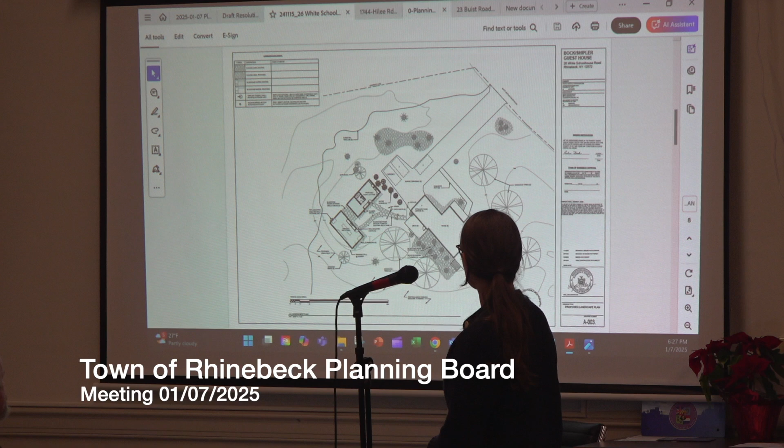And so we're applying for a special use permit. And the existing horse stable on the site, we had actually talked about maybe removing it, demolishing it, because it's not in great shape. But at the pre-conference meeting, we talked about how the look of it is actually quite nice. It feels historic and it feels like it belongs in the place. And I think the owners agreed as well. Really, we were just worried about the number of accessory structures on the site.

So they've decided we're definitely going to keep that, but we are applying for a zoning variance to have 5 accessory structures above the allowable 3. One of those accessory structures is actually the garage that's attached to the house, so just keeping that in mind. And then one is a shed that really can't even be seen from the street or from the front of the house. It's really kind of tucked back on the property.

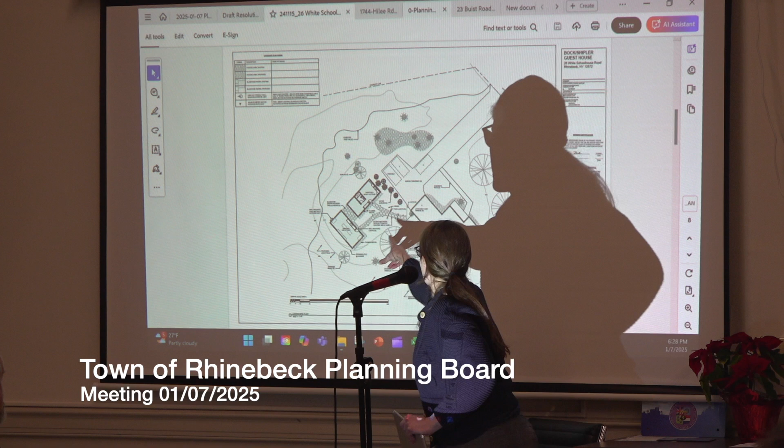So just looking at this landscape plan here, we have a new bluestone path from the main house to the accessory structures. This is the art studio, and this is the guest suite, which will have a bedroom, full bathroom, and kitchenette. And we're pretty far set back from the street. I think it's about 140 feet back from the street, and we're set back far enough from the side lot lines as well.

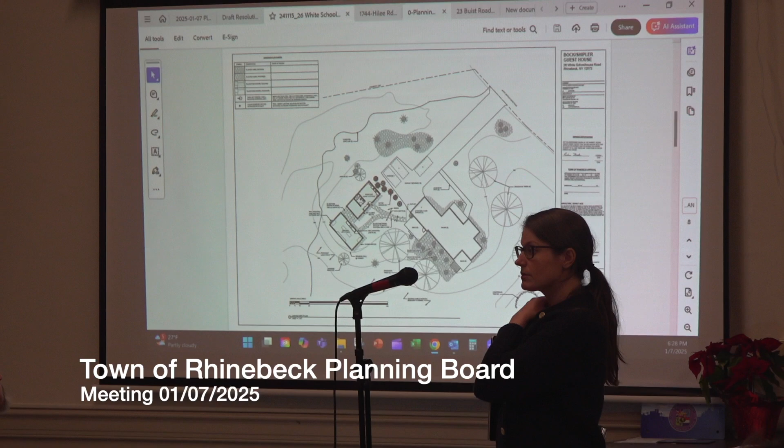Did you have, do we have renderings? Renderings and pictures as well. Yeah, these are all the existing photos of where the structures are going to be located. And this is elsewhere in the backyard area. It's an existing bluestone pathway that we're basically intending to continue that same language for the new path to the new structures.

So looking from the street view, this is where the structures will be, just off to the right of the main house.

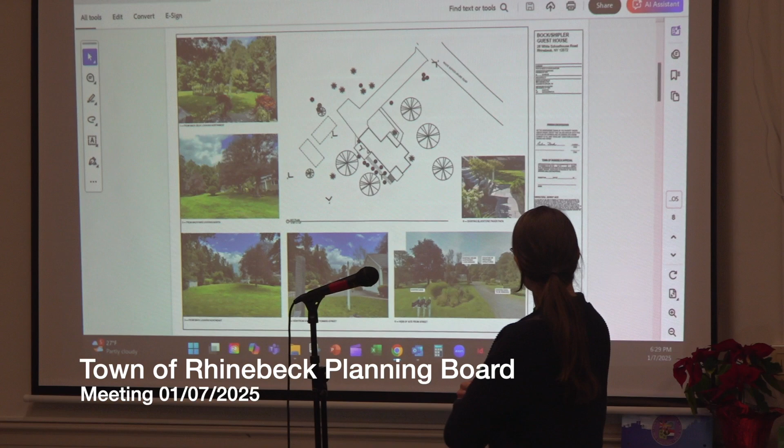Are there elevations of the new structure? Yes. So each is a pretty simple volume with a shed roof. We're using board and batten siding, which is the same as what's on the existing horse stable. It's actually a very similar proportion to the horse stable, which is also an L shape. So the idea is to kind of make it feel as though it's part of that kind of language on the site.

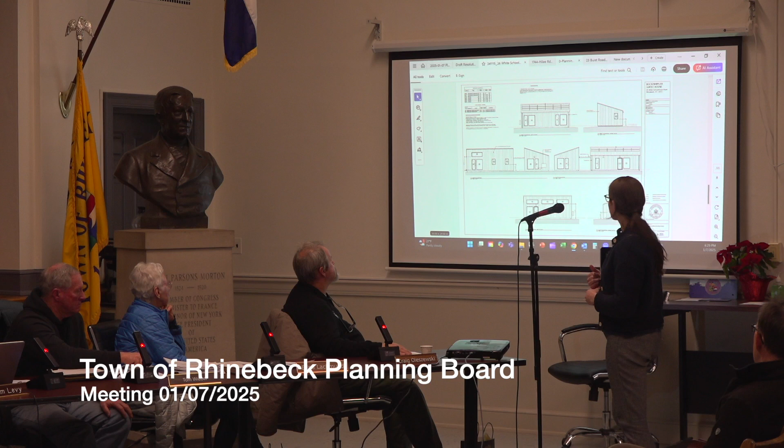And we're looking at some large windows as well as solar panels for the roof. Do you have a color? We're working on that, thinking something in the realm of the house and the existing stable, maybe somewhere in between. The house is sort of a pale sage green. The barn is a little bit of a darker green, so somewhere in between those. If you could make that choice before you come back to the public. Sure, that would be terrific.

Yeah, we've been working on a rendering. The zoning board actually requested a color rendering, so we can provide that at the next meeting for you guys as well. Are those skylights on the roof? No, those are actually solar panels. Ah, photovoltaics. Any solar on the main house? There is no solar on the main house, but there are existing solar panels on the barn, on the horse stable, and those will basically remain as is, and these will be additional panels.

The siding you said is vertical board and batten, is it actual wood? Wood, okay, yes. Yeah, Jim, do internal layouts? Yes.

So the guest suite has the kitchenette along this wall with a window facing the street, and the plan is to have some shrubs here to provide privacy and conceal it from the street. Living area, dining area, and then the full bathroom, bedroom. And then in between is kind of a breezeway with a trellis that hopefully some plants will be able to grow on. So the idea is to connect the two structures visually, but they're not actually connected with an interior space. They will be totally separate in terms of their enclosure.

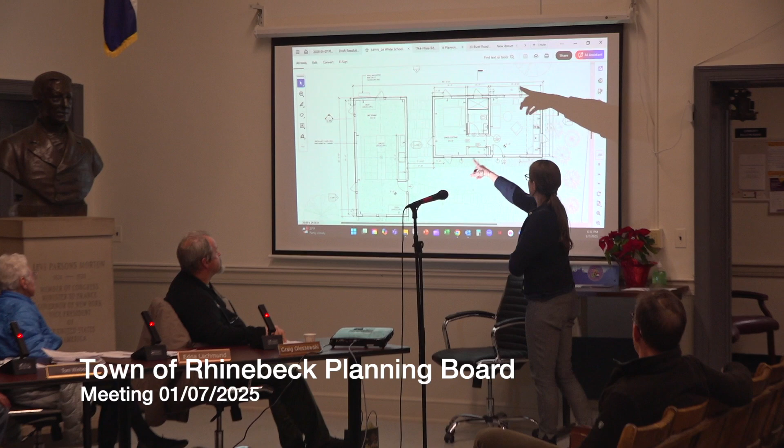And then this is the studio, the art studio, where the owners would like to primarily be making ceramics, but there will be no firing in this studio. It will be just using a potter's wheel and creating the pottery work.

So there's a sink, which will have a special drain on it for sediment, and otherwise there's a floor drain. Otherwise, it's kind of intended to be a big, open, flexible space that they can use. Where does the sediment go? What's part of the processing?

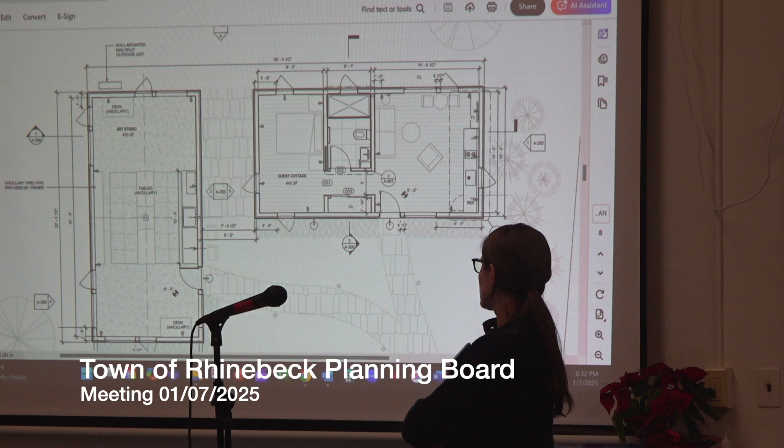The septic? It does go to the septic. Yes, there will be a new septic system for this structure. The existing one actually we don't think has capacity for the additional bedroom, so we're working with the civil engineer on the design of that—he hasn't put that together yet, but the sediment catcher is something we'll discuss with him. I think it does actually catch some of the sediment before it goes in there and dispose of it. Is that right? Well, we can clarify that.

Sometimes with other studios, we ask specifically about the materials that will be disposed of, and there's probably something you should bring. Have you worked with the health department yet? Not yet, because we don't have the engineered drawings yet, but we will be. That probably should be something you discuss with them as well.

Okay, Jim, let's start with you. Okay, a couple of comments, a few questions.

So it was noted, and we did discuss in the pre-con, that while the barn was historic, it was an element of the property and has to be preserved. It is going to be preserved, and that is really the reason why you're going to the ZBA—we did talk about preserving the barn on the site. We felt it kind of fit into the landscape, and it was a shame to lose it. There was a picture of it. Yeah, it's tough to see. So that's the reason for the ZBA variances for the barn down here, and we will actually be talking about that later tonight, because we have a referral from the ZBA on that.

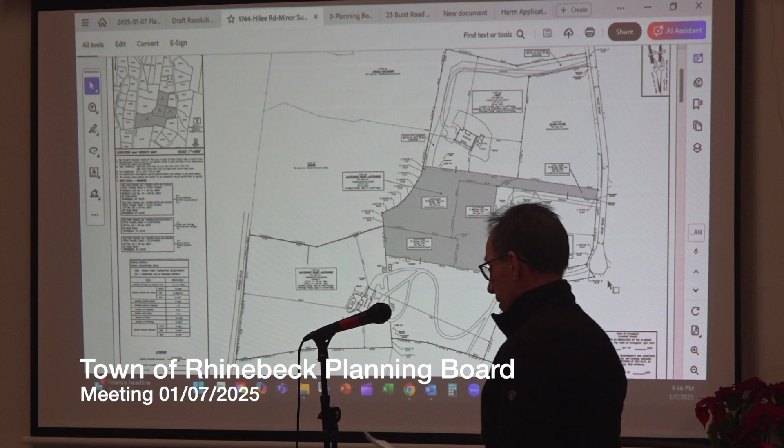This is Hilee Road, Village of Rhinebeck. The water storage tank is located here, and these parcels here were actually part of the original Trend subdivision. This is Burger Road, located right here, and here's Hilee. Scott and Kristen actually own 2 parcels.

It was a subdivision done on Burger Road, and this was lot number 1 of that subdivision. They also purchased the lot where their residence is located, going like this, for construction of the residence. You can see there was a combination of lots, so this was a previous boundary, and now it's all 1 parcel.

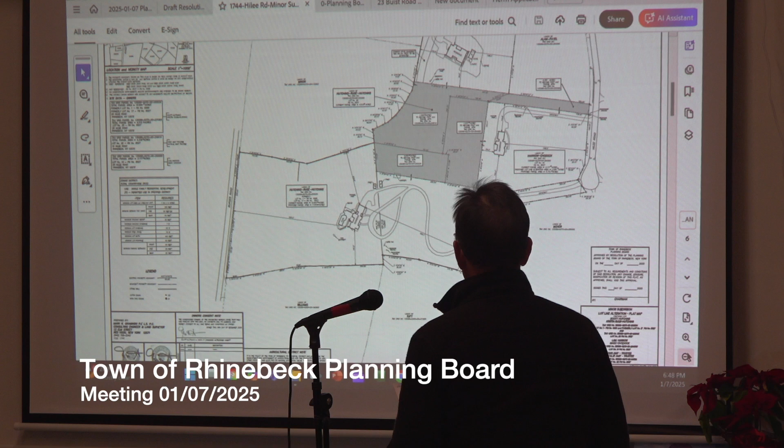I know I'm challenged with colors, but I tried to find contrasting colors that show the final configurations of the property. I also did an aerial overlay. I can go through all the mathematics with the board, but in summary, the lots are getting larger. They were conforming to begin with, and they're now conforming. None of the setbacks for the residence structures on the property require any consideration by the ZBA.

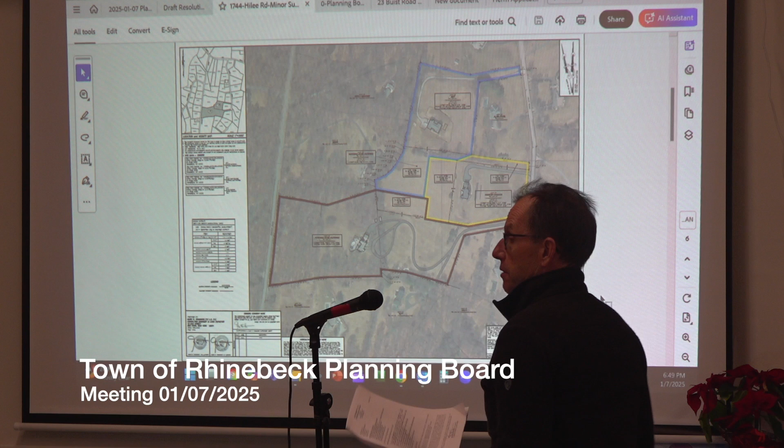So it's simply a lot line alteration that considers these multiple parcels of property.

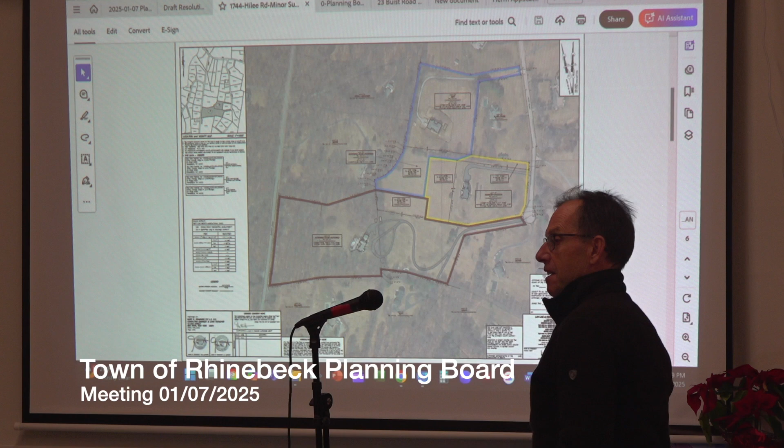I think that's one of the easiest ones I've done in a long time. I would agree, I think we would all agree. Jim, is there anything you'd like to say? I have no issues at all. It's taking an existing lot and subdividing it into other existing lots. We're not adding any lots, so no issues. I think it looks really clean and gets rid of that flagpole, tidies everything up.

I don't know if anybody has any questions at this point. What should you think of it being a little more square? And the colors? Yeah, whatever, but that all makes sense to me.

I'll certainly take comments on the colors, always happy. I like bright green. I do too, it's my favorite color. Everything is green or brown when it comes to being in a field too much. Anybody else? No, all right.

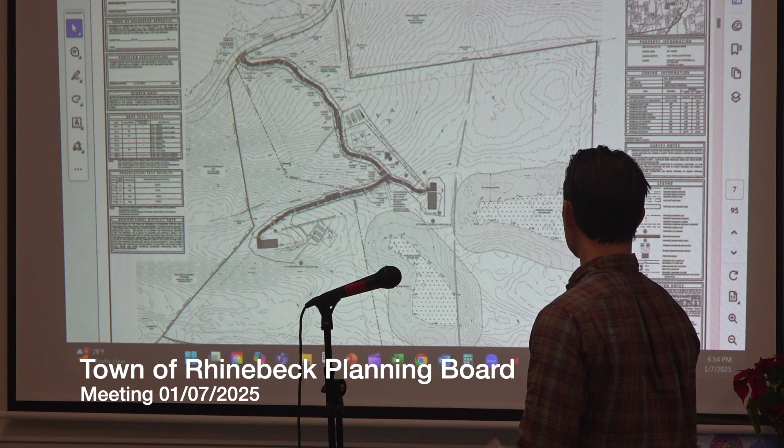There were a lot of comments at the workshop meeting that we went through, and they're all addressed in the narrative. I'll go through those now. But that's the gist of it.

Okay, so as you noted, there were a number of comments. I'm just going through them really quickly. Some of them I think may bring up some discussion, but I think a lot of them have been addressed.

One was that we noticed the driveway is running through an existing stone wall, and as you know, we try and preserve stone walls whenever possible. The applicant has noted that it's going through a significantly deteriorated portion of the wall, specifically chosen due to the poor quality of that portion, so I think that's something we'll want to look at during a site visit.

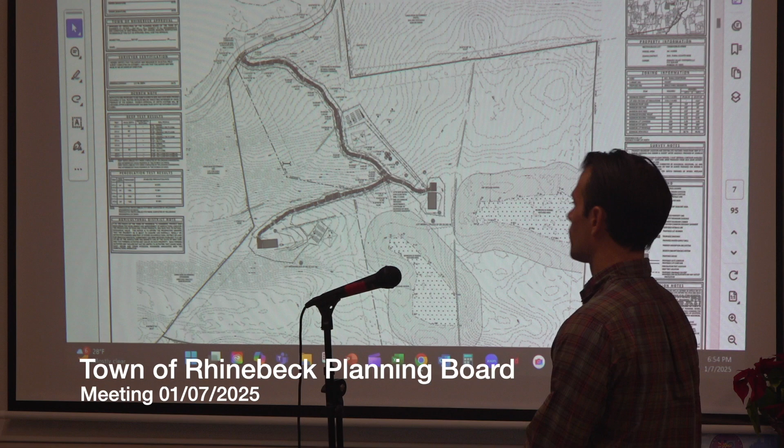We asked for details about tree removal, and they've said that a tree survey will identify any trees over 6 inch DBH that need to be removed.

We talked about driveway grade being 10% or less, and the driveway grade is 10% or less.

We talked about sight lines for the driveway and review by the town highway department. It was noted that the town highway department did grant their approval or acceptance of this in the past, but you'll coordinate with the highway department anyway, just to confirm.

Yeah, so it was originally just going to be one home, and he granted approval for the driveway at that location for one home. We can talk to him again. It'd be good just to confirm. Sure, we're good there.

We noted the 100-foot wetland. They've already reached out to DEC, so I think we're good on that side of things.

We will need to see a driveway easement or maintenance agreement for the file, and you're aware of that. I did note on the plan sheet, zooming in here a bit, on the notes regarding that. You noted the end of the common driveway maintenance here, showing the line, but it doesn't really cut anything off, say, this driveway here.

So it almost seems like this entire driveway from the house all the way down to the road would be part of that common maintenance agreement. I'm assuming somewhere near you want to cut that off, or maybe there's a line I just didn't see.

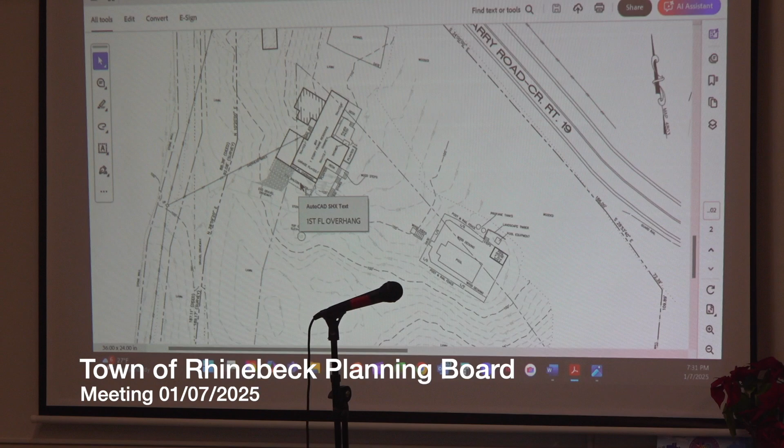Based on our review of the plans and aerial imagery, the proposed work is on existing mowed lawn between the house and the existing driveway. But beyond that is an undeveloped lot that appears to be undevelopable, as wetlands are in the area adjacent to the proposed addition. There is a tree line along Slate Quarry Road that does a good job of at least obscuring any additions from the road, if not blocking those views. Based on the fact that the area is disturbed and doesn't appear to be highly visible or close to any neighbors, I didn't see any issues with it regarding the variance.

However, the proposal for the screen porch may be within 100 feet of the federal wetland, which would require a proposal to the planning board for a permit from the town. I'm not sure about what the deal might be with federal wetland jurisdictions becoming DEC wetland jurisdictions, so there may or may not be something necessary from the DEC for this. I'm really just hoping we get clarification on whether they're going to change their wetlands or not soon. So I don't personally see an issue with the variance.

There's nothing over here, I can pull up the aerial if you want. It's an undeveloped lot, this is all wetlands over here, so nobody's ever going to develop in this immediate area. There's a little bit of land here you can develop, and some further back here, but nothing really across from the house itself, in close proximity.

I don't see an issue with the variance request itself of 15 feet. It's more that there may be other requirements, like a wetland permit from the town, and might need something from DEC. So would it be number 2 followed by those comments?

Yep. Great. May I hear a motion? So moved. Have a motion, second? Second. All those in favor? Aye. Opposed, abstention, thank you.